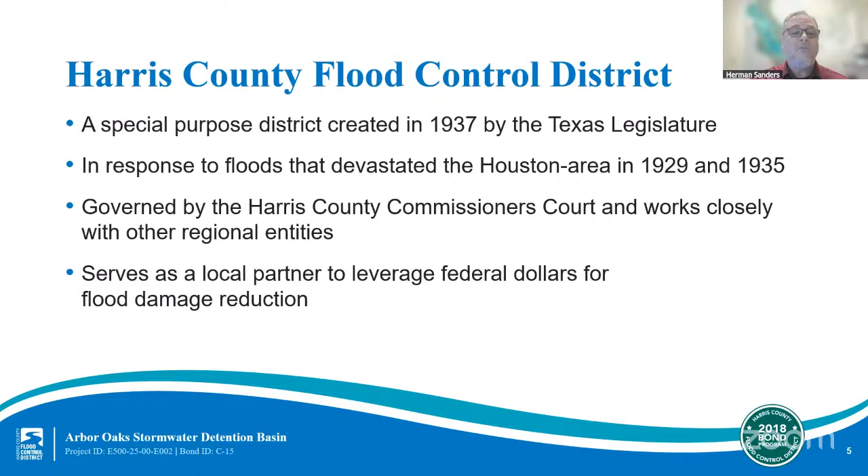Let's talk a little bit about our mission. The mission of the Harris County Flood Control District is to plan, implement, and maintain flood risk reduction projects guided by community and natural values. One of the most difficult challenges we face is constructing effective projects that are sensitive to community and natural values in highly urbanized areas.

Harris County includes 23 main watersheds totaling approximately 1,800 square miles and more than 2,500 linear miles of channel. That's a lot of miles, and in fact, 2,500 miles is approximately the distance from New York all the way across the nation to California.

So, what is a watershed exactly? A watershed is a geographical region of land that drains to a common channel or outlet. Each watershed has its own unique characteristics and needs. The project we are presenting tonight is in the White Oak Bayou watershed.

Harris County is flood prone for a variety of reasons. One, Harris County has extreme rainfall events, including tropical storms and hurricanes. Two, our land is flat and slow draining. And three, we have clay soil, which does not absorb excess rainfall very quickly. It's not a very spongy soil.

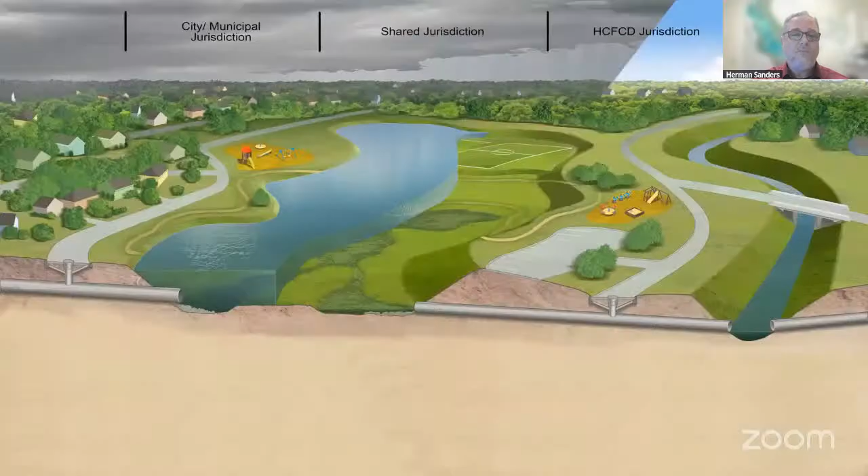While the flood control district plays a critical role in flood risk reduction, we are one of several entities involved in these efforts in our region. This image helps explain some of the various jurisdictions involved. Inside neighborhoods, as shown on the left side of this illustration, storm sewers and roadside ditches collect stormwater runoff and start the process of moving it away from homes and streets. These drainage systems, like roadside ditches or storm sewers, may be managed by the Harris County Engineering Department, a municipal utility district, or a city, such as the City of Houston.

The stormwater then makes its way to the larger bayous and channels, and eventually to Galveston Bay. The bayous and channels are the responsibility of the flood control district. That's us. This is shown on the right side of the illustration.

In the middle is a stormwater detention basin. Our agency may construct a stormwater detention basin to serve as a regional flood risk reduction project, or it could serve as mitigation for channel conveyance improvements, such as widening and deepening a channel. Widening and deepening channels create more capacity to move more stormwater out of an area.

Since it is our policy to avoid any adverse impacts from our projects, detention basins help to safely take in and temporarily store that increase in stormwater so that the improvements made in one area don't simply move the problem elsewhere. Often, we partner with Harris County precincts, utility districts, and others to add recreational amenities such as trails to these basins and along our channels.

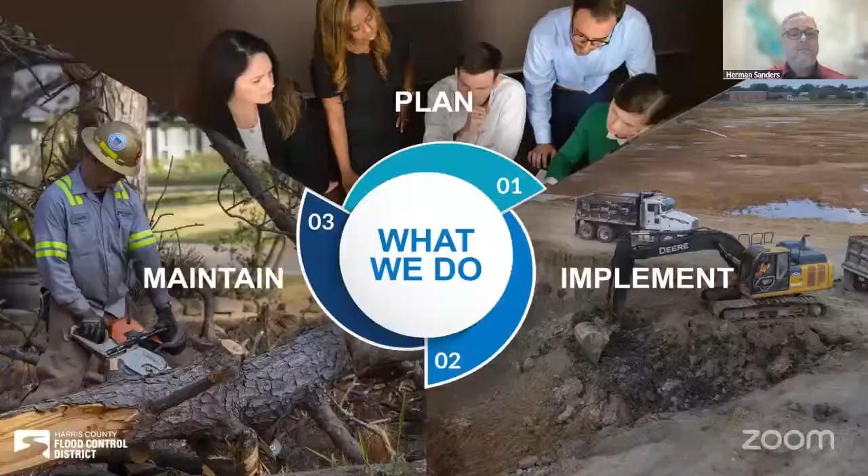So, how do we get all this done? To accomplish our mission, our teams focus on planning and implementing flood risk reduction projects across Harris County, all while maintaining our vast infrastructure network. All three of these activities, planning, implementing, and maintaining, are critical to ensuring the resilience of our region and the safety of our residents.

Our efforts to plan and implement flood risk reduction projects focus on adding capacity to our network and reducing flood risk for neighborhoods across Harris County. At the same time, maintenance teams work day in and day out to ensure our channels are ready to operate as designed during the next storm.

Now let's talk a little bit about the 2018 bond program. Back on August 25th, 2018, Harris County voters approved $2.5 billion in bonds for flood risk reduction projects. This vote followed a series of 23 meetings with community members across Harris County, one per watershed, which resulted in a list of what is now 181 bond IDs. Each bond ID may have multiple projects, and the actual timing of each individual project depends on a variety of factors, including funding, environmental permitting, right-of-way acquisition, and utility relocation, and in some cases, the requirements of a particular grant.

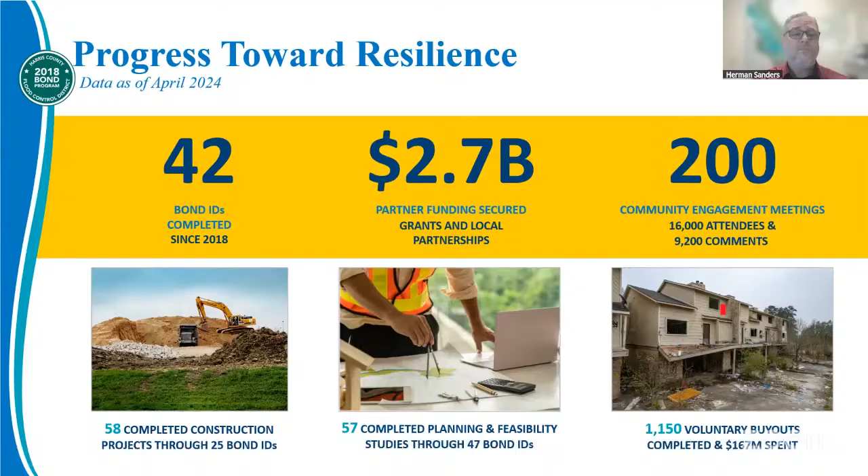While the bond was for $2.5 billion, the estimated total cost of every project in our bond project list is much more. We made it clear from the outset that we would need funding partners to fully construct the projects in the bond program. As I mentioned, we've had significant success so far, having secured more than $2.7 billion in partner funds for projects across Harris County.

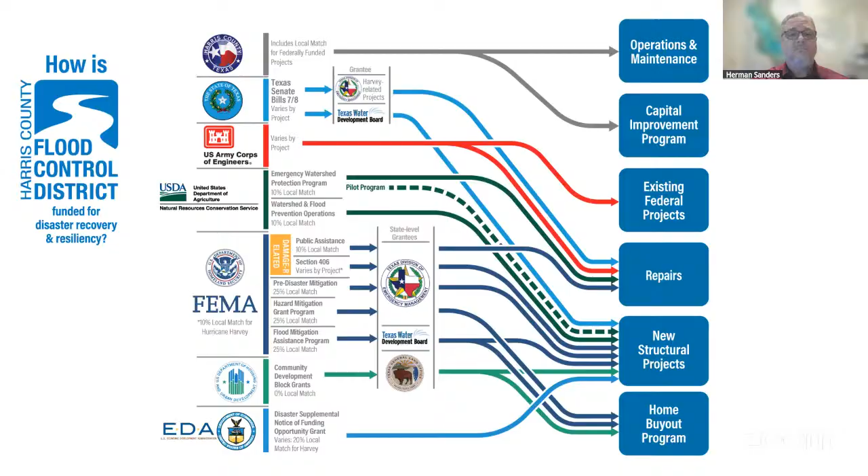The estimated total cost for the Arbor Oaks Stormwater Detention Basin project is $41.4 million, which is the estimated cost to see the project through to completion as of today.

I want to highlight one funding partner for the Arbor Oaks Stormwater Detention Basin project: the U.S. Department of Housing and Urban Development, also known as HUD.

The Community Development Block Grant Disaster Recovery Program is one of the funding programs under HUD. Disaster recovery funding is focused on projects helping communities with long-term recovery after a federally declared disaster. Hurricane Harvey, which hit Harris County in 2017, is the federally declared disaster that allows the Flood Control District to apply for this disaster relief funding.

The Texas General Land Office, or GLO, administers the grant program at the state level for HUD. This means the GLO distributes funds to local, county, and state agencies that apply for and are approved to receive funding for projects benefiting areas directly impacted by Hurricane Harvey.

The Flood Control District has been awarded approximately $322 million for projects meeting the funding program's requirements. The Arbor Oaks project is receiving $34.2 million in CDBG disaster recovery funding. This project's service area was determined to benefit households where at least 50% of the population meets the federal classification of low to moderate income. All Flood Control District projects receiving CDBG disaster recovery funds must be completed by February 28, 2027.

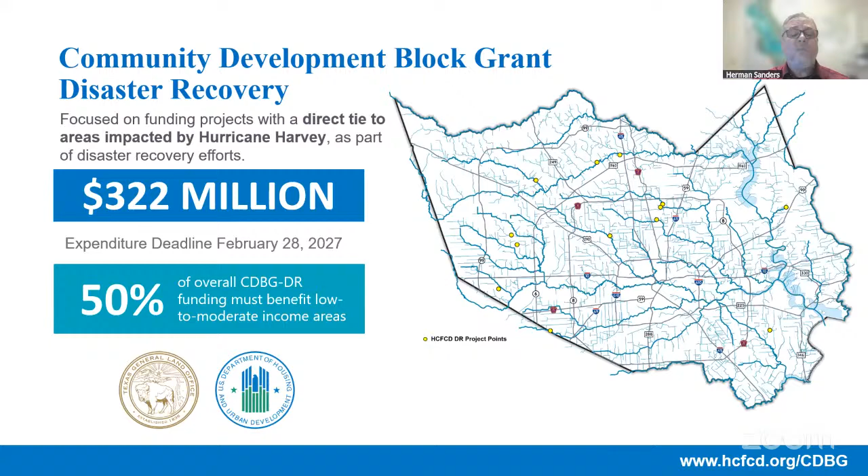I previously mentioned several sources that fund projects by the Flood Control District. Let's take a look at each of the funding sources for the Arbor Oaks Stormwater Detention Basin. First, after voter approval of the 2018 bond, the Flood Control District initiated bond ID C-15 for the Arbor Oaks Stormwater Detention Basin. The 2018 bond program allocated funds for this project for property acquisition and preliminary engineering efforts.

The total project budget under the project charter was $41.4 million, but this amount is subject to change as it is only an estimate. All non-CDBG funding sources must be applied to this project prior to our ability to utilize CDBG disaster recovery funds.

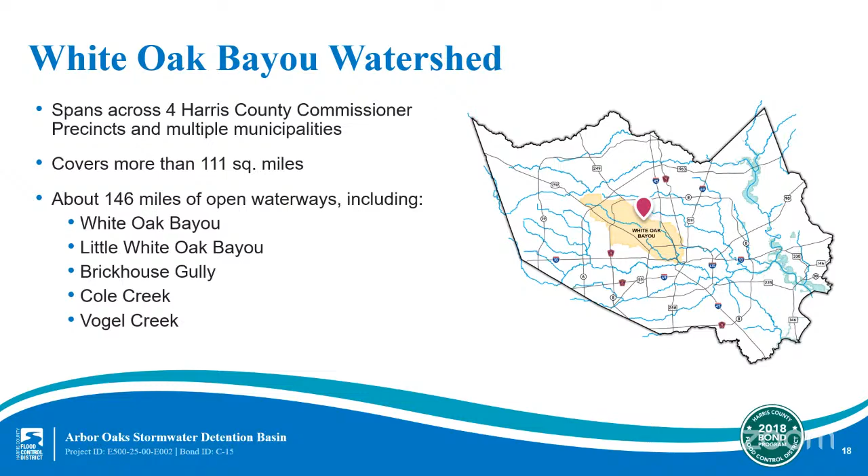Thanks, Herman. We'll start by talking about the White Oak Bayou watershed, as the Arbor Oaks Stormwater Detention Basin project site is located within the White Oak Bayou watershed, and Herman talked about what a watershed is earlier in the presentation.

The map on the screen identifies the limits of Harris County through the black outline, and the White Oak Bayou watershed is shown there in yellow. The red pin on the map shows the approximate project location within the watershed.

The White Oak Bayou watershed spans across 4 Harris County Commissioner precincts and multiple municipalities as it stretches from central to northwest Harris County and includes the cities of Jersey Village and City of Houston.

Overall, the White Oak Bayou watershed covers 111 square miles with 146 miles of open waterways, including White Oak Bayou itself and its major tributaries, which are Little White Oak Bayou, Brickhouse Gully, Cole Creek, and Vogel Creek.

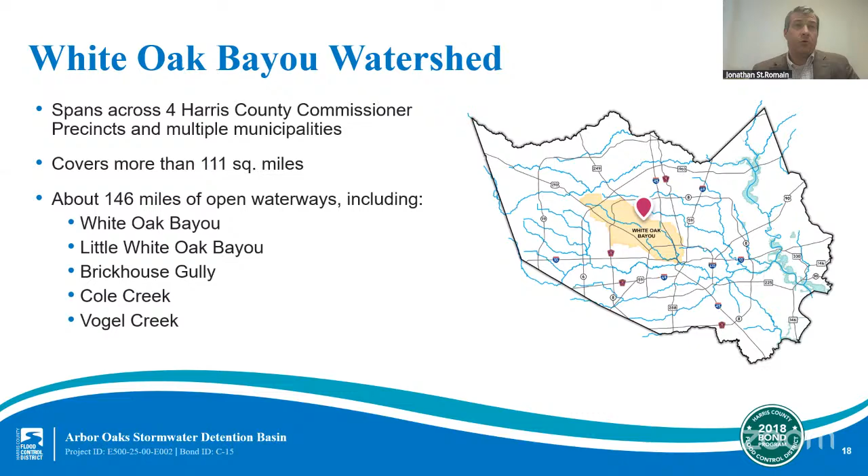Now let's take a look at this specific project. The Arbor Oaks project site is located in Harris County Precinct 1 and within the limits of the City of Houston. The project is also located just northwest of the intersection of Antoine Drive and West Little York Road. The project directly intersects with the confluence of White Oak Bayou and its Vogel Creek tributary.

Following Tropical Storm Allison in 2001, the Flood Control District initiated a robust countywide voluntary buyout program to help move eligible homeowners out of harm's way. The program included several homes in the Arbor Oaks neighborhood.

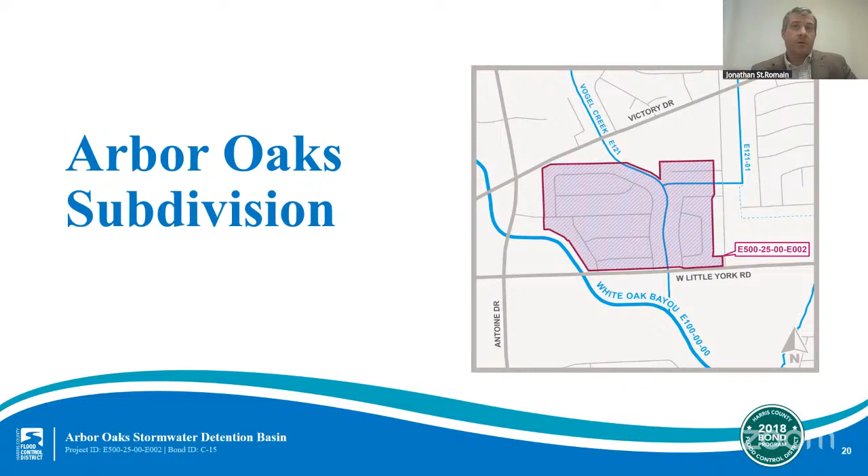Since the early 2000s, 207 former owners of flood-prone properties within the Arbor Oaks subdivision have been assisted in moving to higher and drier ground through the Harris County Flood Control District's home buyout program. Over the last few years, an additional 19 properties within the proposed project footprint were acquired in order to design and soon construct the Arbor Oaks Stormwater Detention Basin.

We're currently approaching the end of the design stage for the Arbor Oaks Stormwater Detention Basin, and we're getting close to the construction stage. There are several steps required prior to starting construction, but we anticipate breaking ground on this project in the third quarter of 2025.

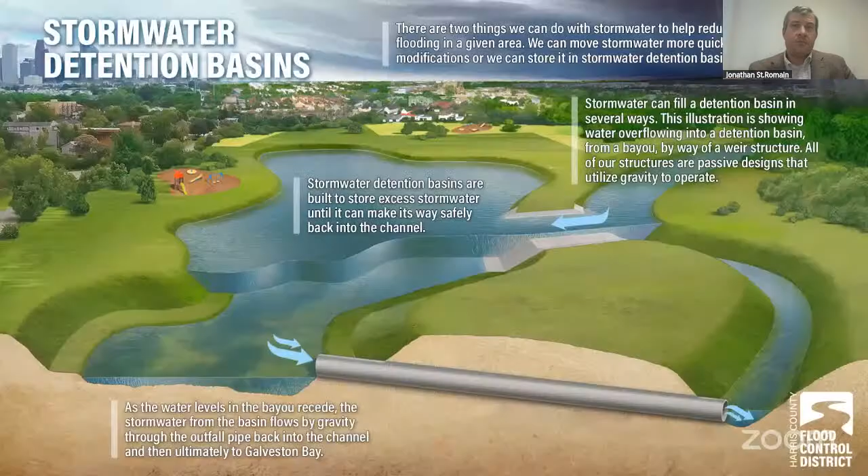So let's take a minute to further explain how stormwater detention basins work in flood mitigation. Stormwater detention basins provide storage for runoff of floodwaters. This storage is temporary and it prevents water from overwhelming channels. While channel conveyance improvements move stormwater more efficiently out of an area, stormwater detention basins can be strategically located to temporarily store increased water to ensure the risk of flooding is not transferred to downstream communities.

When channel stormwater levels drop back down, the stored stormwater in the basin drains back into the channel by gravity through outfall pipes that are appropriately sized to drain the basin. This is important because, as mentioned before, the Flood Control District is a no adverse impact agency, which means we don't allow our projects to reduce flooding risk for one area by increasing it for another. Note that when stormwater detention basins are used in conjunction with channel conveyance improvements, detention is usually constructed first to avoid those adverse impacts, and these basins do provide benefits on their own in this interim condition.

While all stormwater detention basins essentially function to store stormwater, they can be designed in many different configurations. They can be designed as one large basin, as shown here, or made up of several compartments that function together. Stormwater detention basins and their compartments can be designed as either wet bottom or dry bottom. Wet bottom basins feature a permanent pool of water, and the area from the top of the permanent pool up to the top of the bank is available for additional stormwater storage. Dry bottom detention basins function the same way, but they feature a grassy lining and are designed to drain dry between rain events. Some dry bottom basins, if they're large enough, can even be used for recreation between storms.

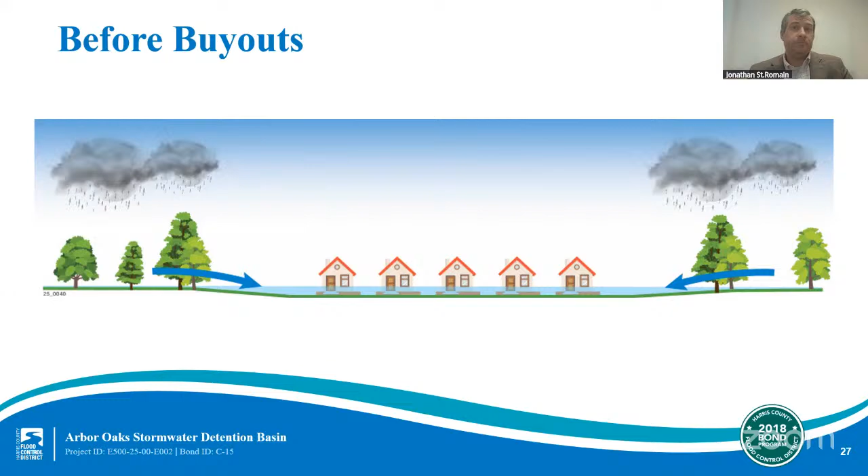By purchasing these homes and helping to move the residents to higher ground, we were able to demolish the structures, and we ultimately intend to construct this stormwater detention basin within this area of Arbor Oaks. We can leverage the natural topography and increase the stormwater storage capacity to reduce flood risks for the surrounding area.

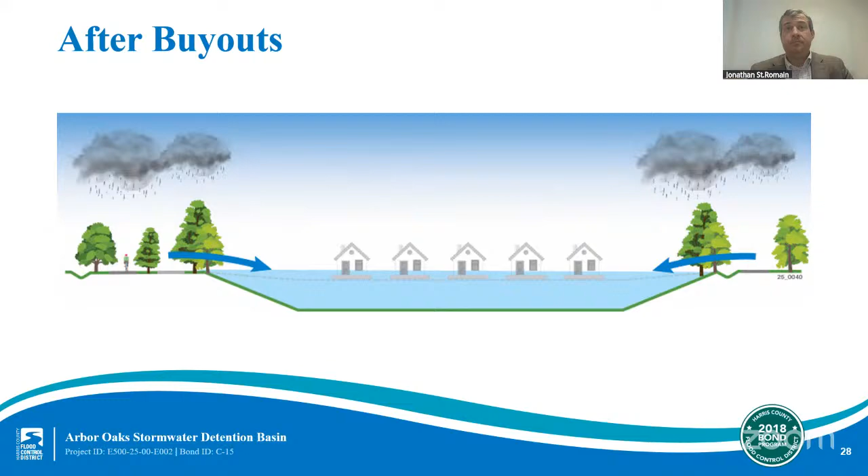At the last community engagement meeting in 2021, held during the end of the preliminary engineering stage, we shared that the Flood Control District planned to construct a stormwater detention basin within this 68-acre site to provide additional stormwater storage capacity in the region.

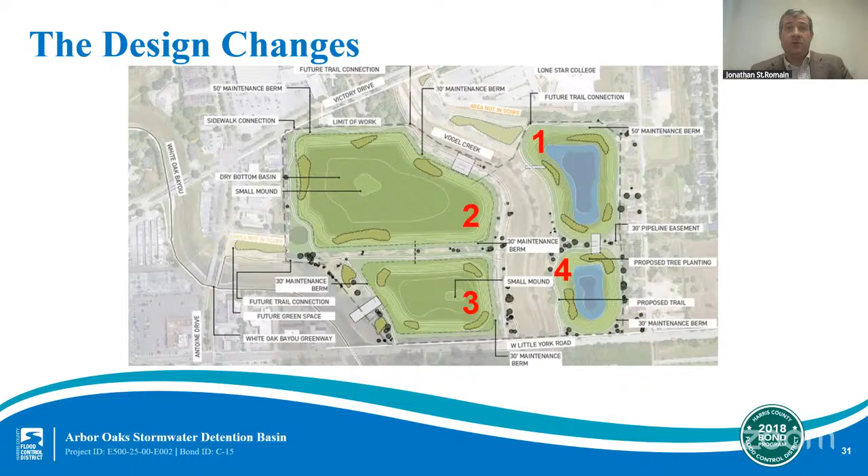The Arbor Oaks Stormwater Detention Basin is expected to provide approximately 221 acre-feet of stormwater storage. Based on the Atlas 14 100-year design storm engineering models, after the project is constructed, the area of inundation from that 100-year storm event is expected to be reduced by 52 acres and 2.3 miles of roadway. Water surface elevations along White Oak Bayou are expected to be decreased by as much as 0.05 feet.

When we say water surface elevations are decreased, we mean that a particular storm event will cause White Oak Bayou to rise to a specific level today, before the project occurs. But after the project is completed, that same specific storm event would produce a water level in White Oak Bayou that's lower than before, so that flood risk to homes and people is lower.

Also, as part of this project, a benefit already realized even before construction has started is that numerous flood-prone structures have been demolished and cleared so that they'll never flood again.

As part of the grant from the Natural Resources Conservation Service, natural restoration of the area is a key component of the project. Tree preservation to protect existing mature trees where feasible has been incorporated into the design of these compartments. The design plans also include the planting of 77 trees within the 68-acre footprint site, and the plans also call for thousands of wetland plantings.

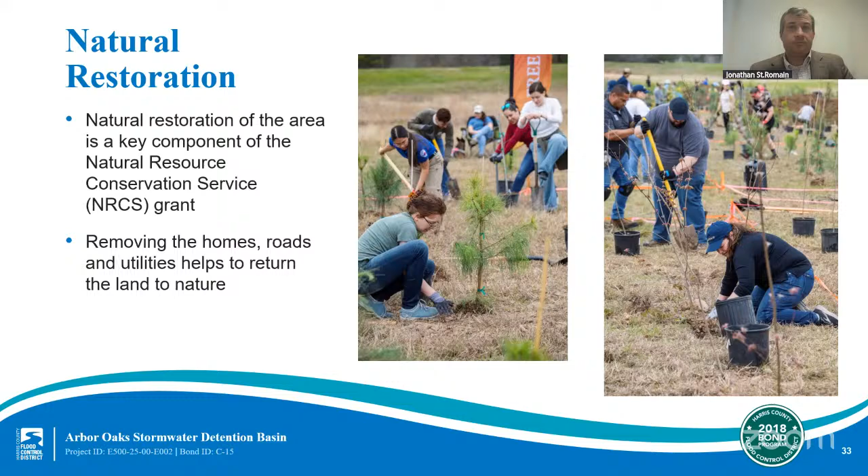Now that I've provided an update on the current design and the project's benefits, let's take a look at the outlook for the Arbor Oaks Stormwater Detention Basin project and our next steps.

When following our project life cycle, after the design stage comes the construction stage. As part of our standard practice, the Flood Control District will advertise the project for bids. We anticipate this happening next month. After the bids are received and reviewed, the contract can be awarded after approval from the Harris County Commissioner's Court. Based on our current timeline, we anticipate construction to start in the third quarter of 2025, and if everything progresses according to plan, the project could be completed by the fourth quarter of 2026.

As we get closer to construction, we'll provide more updates to the community. Please make sure you sign up for our mailing list by visiting hcfcd.org/C15 and submitting a comment.

During construction, please note that you may encounter things like truck traffic and heavy machinery on the streets near the project site. There will be one access point on the corner of Vogel Road and West Little York that will be used for entering and exiting the project site. But again, we'll provide more detailed updates once we're closer to starting construction.

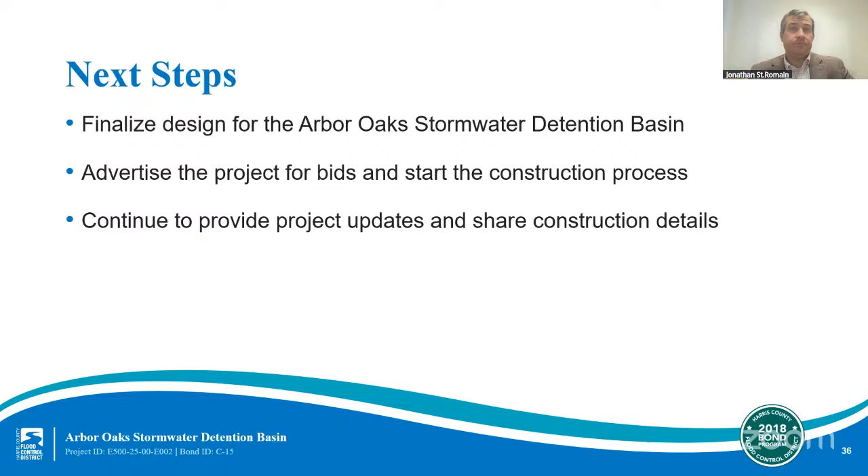In addition to the Arbor Oaks Stormwater Detention Basin, I want to quickly give an update on two nearby projects. I'm happy to share that the White Oak Bayou Federal Flood Damage Reduction Project's segment from FM 1960 to Hollister Road is now complete. And the final segment, from Hollister Road to Cole Creek, is anticipated to remain under construction until the third quarter of 2025.

As for the Inwood Forest Stormwater Detention Basin, this project started construction in May of 2023 and is still actively underway. The stormwater storage capacity for the combined 12 interconnected compartments is approximately 1,200 acre-feet, which means it will provide a total capacity of a little over 391 million gallons of stormwater storage. It's anticipated to be complete in early 2026.

If there are any questions about these nearby efforts, please drop your question in the chat and we'll get back to you after tonight's meeting.

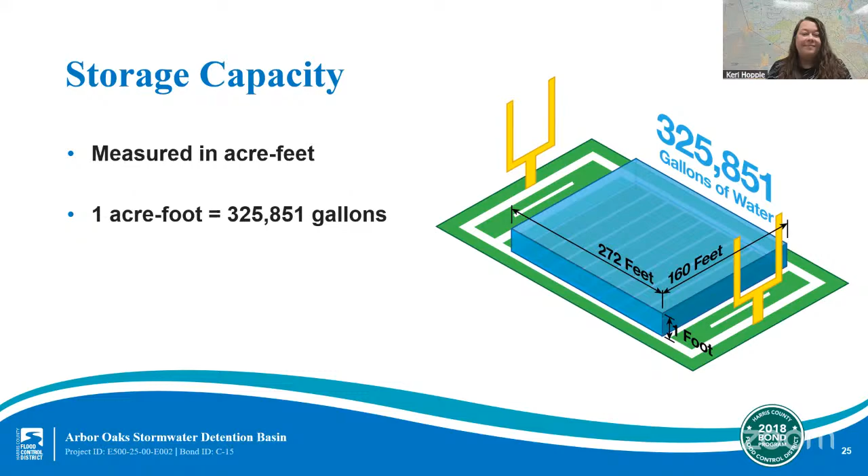Thank you, Keri. In a follow-up question, what is the objective of this project? The primary objective of the Arbor Oaks Stormwater Detention Basin is to reduce flood risk in the Arbor Oaks and Greater Inwood neighborhoods by increasing stormwater storage capacity along White Oak Bayou and Vogel Creek. However, we are also restoring the area back to nature, which was also a key objective in this project.

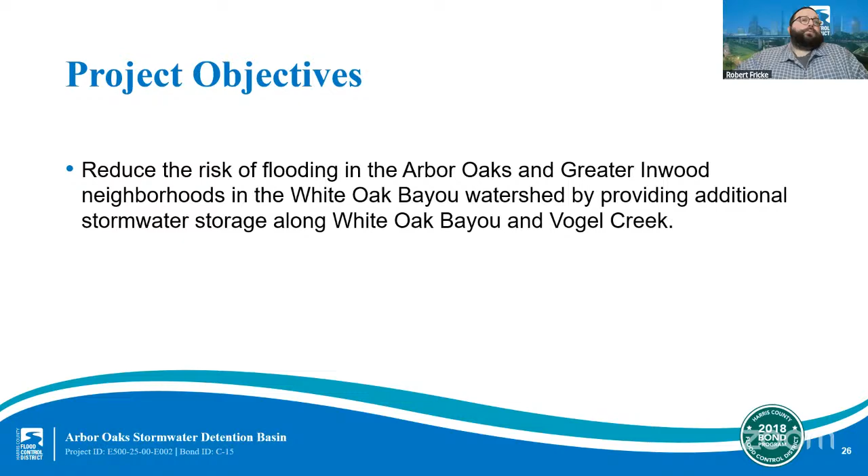All right, thank you, Keri. Residents are obviously curious as to when this project will begin construction. Jonathan talked about project stages in the presentation, but can you also share with us what that means in terms of timing?

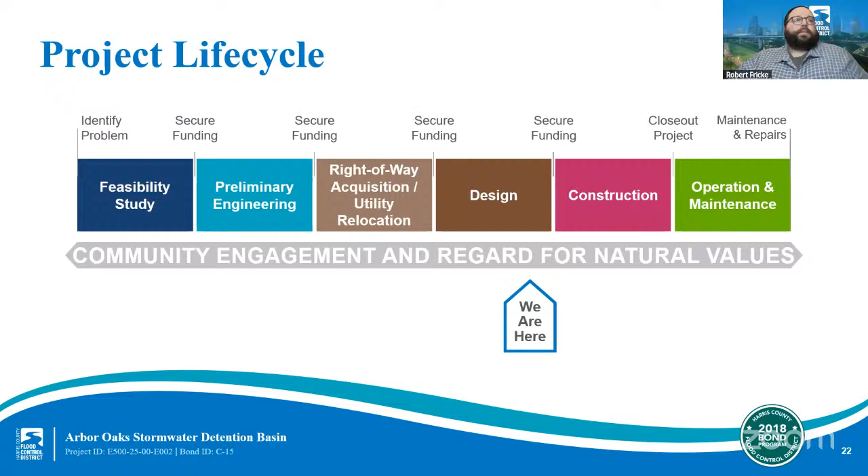All right, thanks, Keri. Jonathan, can you talk a bit about the funding sources for this project, please? Sure, that's a great question. This project is a really good example of how we have to fund these larger projects with multiple funding sources, and sometimes it's difficult to convey the scale of these projects. We're talking about tens of millions of dollars. We have the $41 million cost estimate, which illustrates the scale of the need for flood risk reduction projects in the area.

That translates into some pretty substantial costs, so when we look to find funding sources, a lot of times we have to seek multiple partners, meaning multiple grant programs. These grant programs don't always have $41 million, so we've got to piece together some smaller grants to get to that price tag.

So the Arbor Oaks Stormwater Detention Basin, like we said, is being funded from multiple sources. A pretty large chunk of that is $34.2 million from the Community Development Block Grant Disaster Recovery Program, which Herman talked about in the very beginning of the presentation. Community Development Block Grant is a grant program that comes through HUD, the U.S. Department of Housing and Urban Development, and it flows through the state level, the Texas General Land Office.

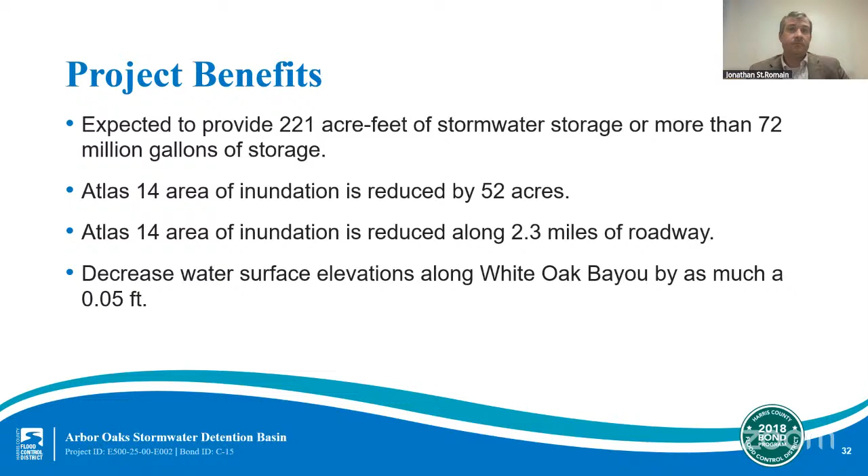Keri, Eileen has joined us tonight and is asking how construction equipment for the Western Compartments will access Vogel Road at Little York. Do we have that information available to share tonight with Eileen?

Thank you for the question, Eileen. Accessing a project site is something we coordinate with the contractor once they're selected and the contract is awarded. We do have stabilized construction access areas for them to come onto the project site, but we will coordinate where they're routing their vehicles basically after they're selected and right before construction starts.

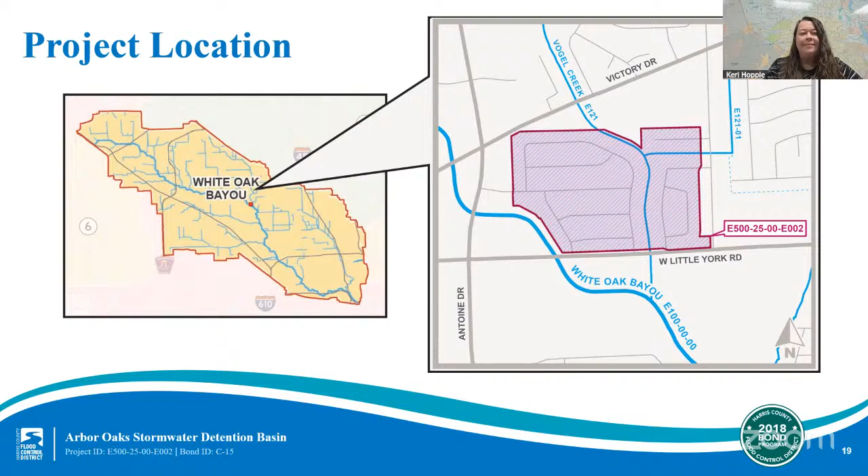All right, thanks Keri. Our next question is for Jonathan. Jonathan, maintenance is a very important part of the work we do. Is the flood control district responsible for maintenance and upkeep of stormwater detention basins after construction?

Generally speaking, yes. Mowing, debris removal, and vegetation management are the responsibility of the flood control district. We mow the majority of channels and basins three times a year during the growing season.

However, sometimes a municipal utility district or a homeowners association may choose to enter into an agreement with us where they take on the responsibility of additional mowing. If they want more than those three times a year, they can enter into an agreement with us and mow more often. If a recreational sponsor chooses to build and maintain a recreational amenity on flood control district property, mowing may be part of that agreement too, if it's appropriate.

As it relates to Arbor Oaks, which was part of the voluntary buyout program, the flood control district did mow those buyout lots eight times a year, about once a month during the growing season.

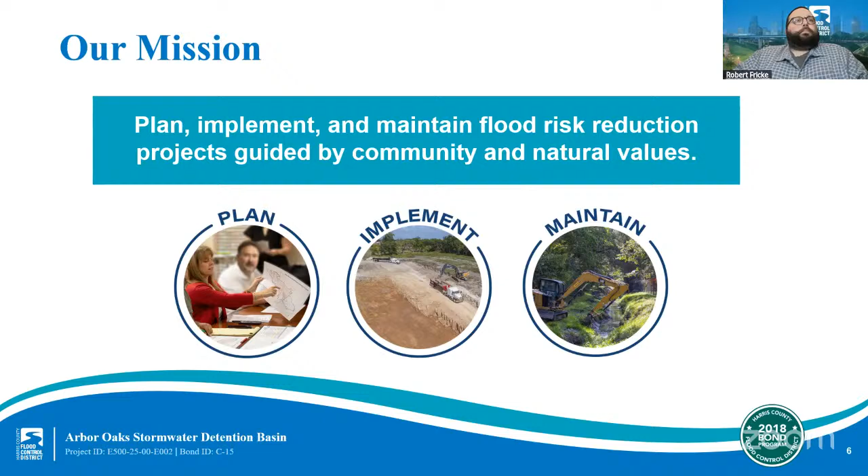Jonathan, sticking with you for the next question: Harris County is flood prone as a region based on several factors that Herman mentioned in the presentation—flat, slow draining land, clay soils, tropical storms, or just heavy rainfall in general. Will this project protect areas from future flooding in this area?

It will help, but it's impossible to say that any one project will completely end flooding in an area. This project will reduce the risk of flooding by storing excess stormwater during heavy rain events—that's the 221 acre-feet of storage we talked about getting stored in the detention basin instead of overwhelming the channel.

But the risk of flooding will remain in this area and everywhere in Harris County, and for that reason, the flood control district does recommend that everyone in Harris County and surrounding areas purchase flood insurance.

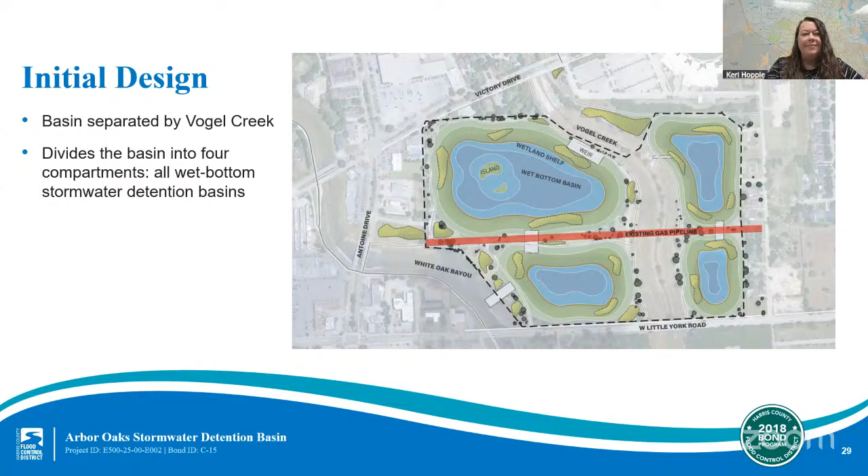Thank you, Keri. I think now may be a good time to review the types of stormwater detention basins again. Jonathan, can you please explain the difference between a wet bottom basin and a dry bottom basin? And can you also talk a bit about why our agency often avoids using the word pond, as in detention pond?

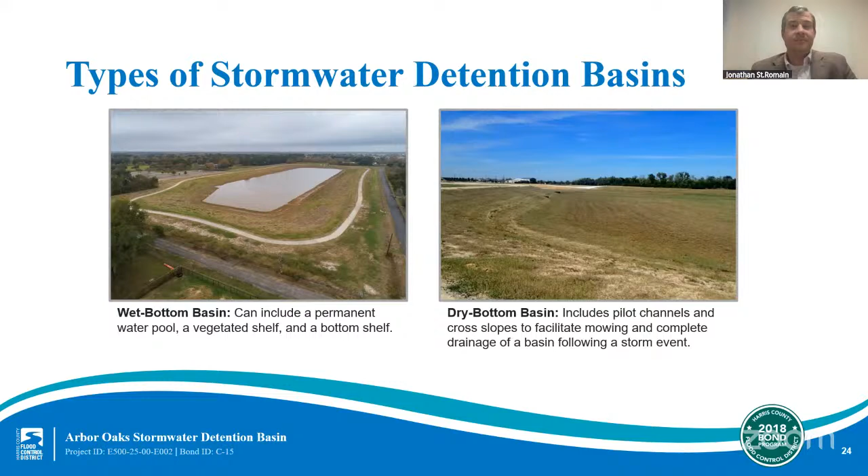Keri, community engagement is a key component of the work by the Flood Control District. Can you let us know if this is the first time the community has heard about this project?

Well, I am the newly designated project manager for the Arbor Oaks Stormwater Detention Basin project. This project has been in the works for years as it went through the project life cycle stages. So I am picking up this project at the end of the design stage and before the construction stage. The Flood Control District held a community engagement meeting about this project in April 2021. At that meeting, this project was in the preliminary engineering stage, and we shared information about the initial design for the stormwater detention basin and its compartments. As you know, there have been some changes to the initial design since preliminary engineering, which is not uncommon as the project team gets more information or data to consider during the design stage.

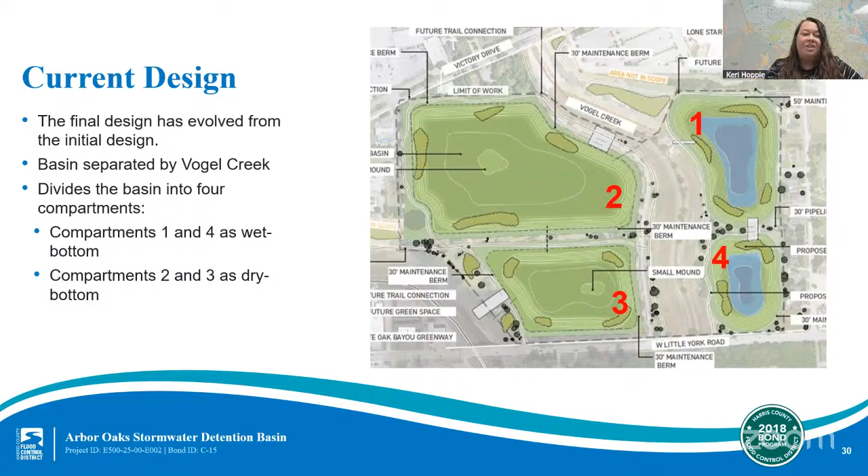Thanks, Keri. And also, what other opportunities will there be for public input on this project? The Flood Control District always welcomes input on projects at any time. If you don't get a chance to ask your questions tonight, or if you think of a question you wish you would have asked, please visit www.hcfcd.org/C15 and click Submit a Comment to ask a question or provide project input.

Thanks, Keri. And Jonathan, back over to you for this one. Mr. Mackey and Mr. Salas want to learn more about the contamination issue. How significant is this issue? Where did it come from? And what are the plans to deal with it or remediate it?

Great question. Finding these environmental concerns during our project is... Jonathan, your microphone is dipping out again. Sorry, your audio. Is this better? Perhaps you can reconnect. I'll jump back out and come back in. Okay, no problem. We'll come back to Mr. Mackey, Mr. Salas. We will come back to your questions.

Moving on, Keri. You may have touched on this one in an earlier answer, but we often receive concerns from residents about increased traffic caused by area projects where roads or lanes are closed for safety or access purposes. Can you let us know again if there will be road closures or disruptions in the area? And Kay would also like to know if we plan to have a single point of access for construction.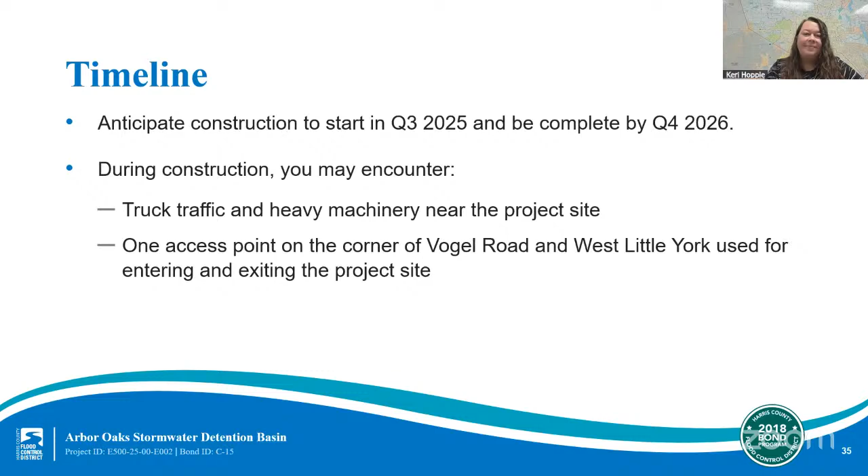And thank you, Keri and Jonathan. You were able to reconnect.

Back to the question from Mr. Mackey and Mr. Salas. They want to learn more about the contamination issue. How significant is the issue? Where did it come from? And what plans are there to deal with it?

Sure. Can y'all hear me okay now? It's better, it's better. Okay, I can try to get a little closer. Maybe this helps. Perfect.

Good. So finding these environmental concerns during our flood control projects is not uncommon, especially in urbanized areas that have a history of industrial or commercial activity. As part of our preliminary engineering stage, before we move into design, we conduct lots of field activities like geotechnical investigations and surveying. And one of the main things we also do is these environmental investigations. The environmental investigations include cultural studies and wetland delineations and determinations, as well as an analysis on endangered species.

And then the study that comes up with the contamination issue is what's called an environmental site assessment. It's the environmental site assessment that identifies the contamination issue. Through that study, our environmental in-house folks and consultants on the engineering team go through a series of analyses to figure out exactly where the contamination is, where it's coming from, and what we can do about it, and coordinate with permitting agencies to make sure that our path forward is able to get the project permitted.